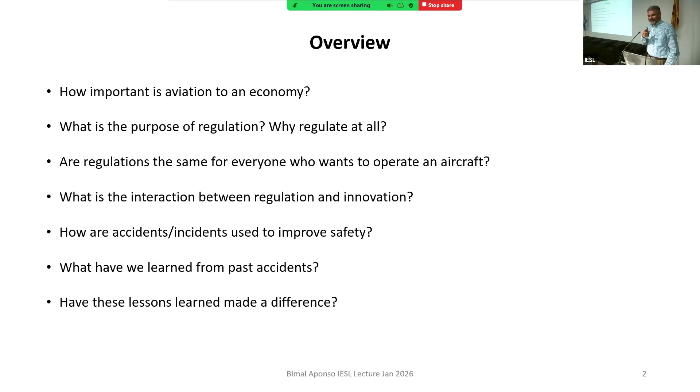A colleague of mine and I came up with what we try to do: figure out a few questions the audience might be interested in. So these are the kind of questions I'm going to try to answer.

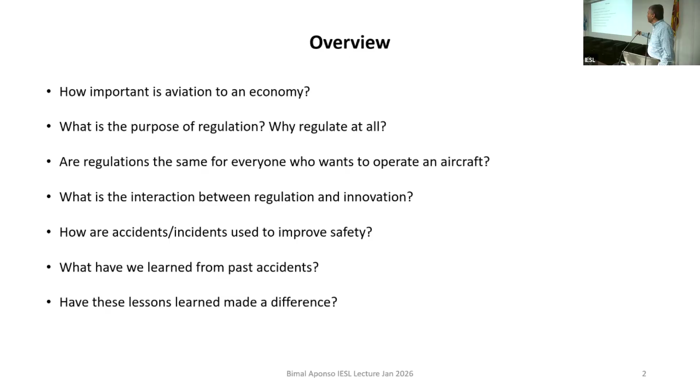How important is aviation to the economy? What's the purpose of regulation? Why regulate at all, why not let industry self-regulate? Are regulations the same for everyone who wants to operate an aircraft? Do you apply the same regulations to an airliner as to a guy who wants to fly on the weekends? What's the interaction between regulation and innovation? I alluded to that a bit before. And how are incidents used to improve?

That's one of the focuses of the talk, along with what we've learned from past accidents. Has it made a difference in current aviation? So, to the first question.

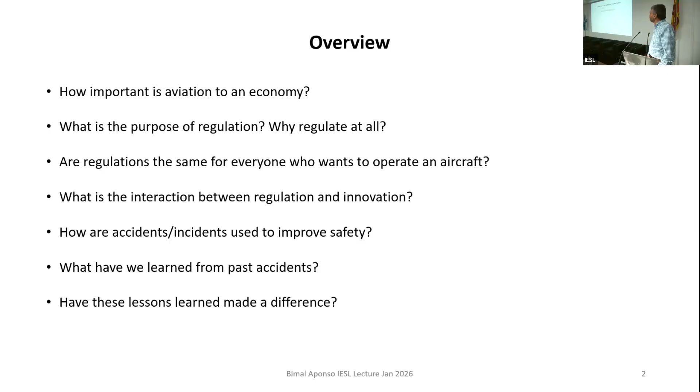Let's see if I can play this. Oops.

What you'll see here is a day in the life of the US airspace system. Starting around midnight, you'll see the aviation system begin to wake up, first in the middle of the country. Around Memphis, the late-night package carriers like FedEx start their operation, so you see Memphis as a big spot of activity as all the flights are sorted out and the packages sent out.

Then as daylight begins on the East Coast, you see it wake up with a sheer volume of aircraft, all managed by the FAA. You can see some Atlantic flights heading out and a few Pacific flights coming into the West Coast.

As daylight moves westward, flights across the country and other cities start to wake up. You can see the big hubs, Atlanta down here, Chicago up here, and this area is the New York airspace, one of the most crowded in the world. But all this happens safely.

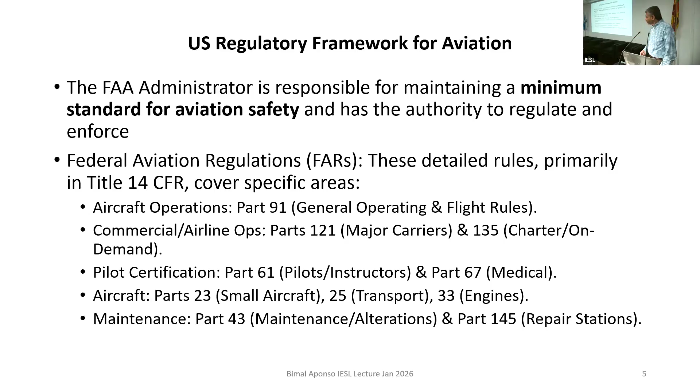So now, trying to deal with the democratization of the airspace. When you regulate, you want everybody, at least in the US, to be able to access the airspace, because it's a public right. So you need the person with a Cessna flying on the weekends, to a private jet, to an airliner, all need to have access to the airspace, but you can't apply the same regulation to all of them. It's not fair. It's too burdensome.

So Congress set up a framework that says when you're prescribing regulations, you have to consider the duty of an air carrier to provide a service with the highest possible degree of safety, but also consider differences between commercial air transportation and other types of air commerce. If you try to apply the same rules broadly, it becomes too burdensome and won't allow access to airspace for the helicopter flying medical equipment, emergency stuff, or the private pilot flying for pleasure.

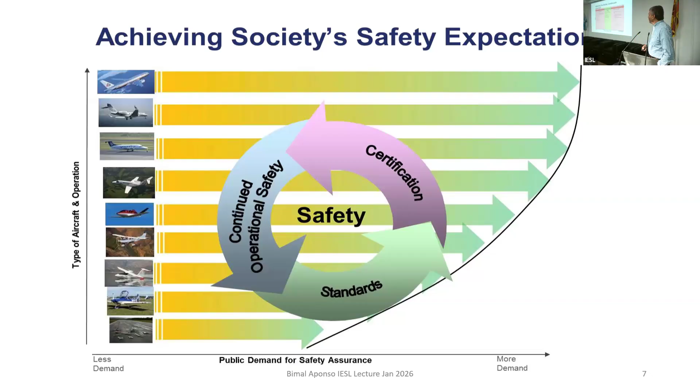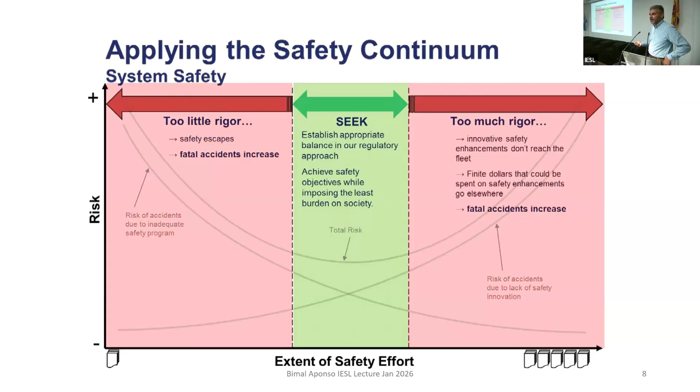So just a quick word about some of the regulations, to show where public perception is really important. You'll see later on some of the accidents where changes came because the public really advocated for them. Initially, back in the 1930s, nothing really galvanizes public opinion rather than famous people. So in '31, and four years later, a couple of crashes killed some really beloved, well-known people. They established the Civil Aeronautics Act and said, okay, with the safety board, we started ensuring — if we want this airline system to be relevant and successful as an industry, then we need to set a level of safety, we need to regulate. They didn't do that until the public came up and said, okay, you need to regulate.

There were two mid-air collisions, one over the Grand Canyon en route, flying visual, and one in the terminal area in New York.

These two accidents resulted in large changes in the air traffic control system. For example, after this, they basically said all aircraft are going to be under radar control. Previously, airplanes got on an airway route and were allowed to visually separate and go on.

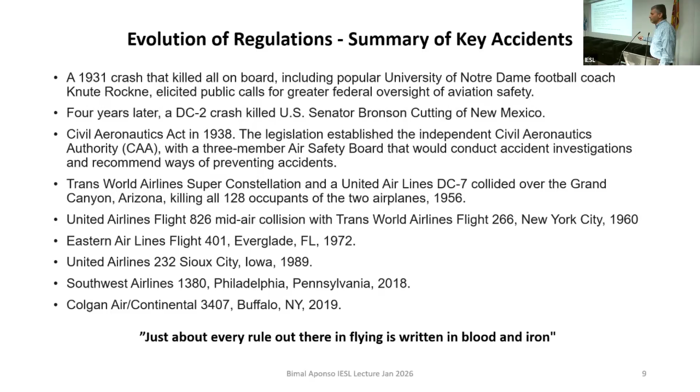Key in this is the United States Congress set up the National Transportation Safety Board in 1967. This is a very important part. A critical part of this is it's a completely separately funded agency. They are not part of the Department of Transportation. They are essentially almost a law unto themselves. So they are not reliant on funding from anybody else, and they are then free to provide completely unbiased opinions on accidents.

They actually look at any kind of transportation accident. Most famously you hear about them in aviation accidents, but big bus accidents, or even pipeline issues, anything used to transport stuff, they will look at it. I think even the oil well blowup in the Gulf of Mexico, they investigated.

So it's a very critical part. Now, it's funded separately, and the FAA, when they make recommendations, the FAA doesn't act on all of them, but the FAA has to say either yes, we agree with this and here's what we're going to do, or no, this is not practical. So this is always the relationship between the FAA and NTSB - not entirely friendly.

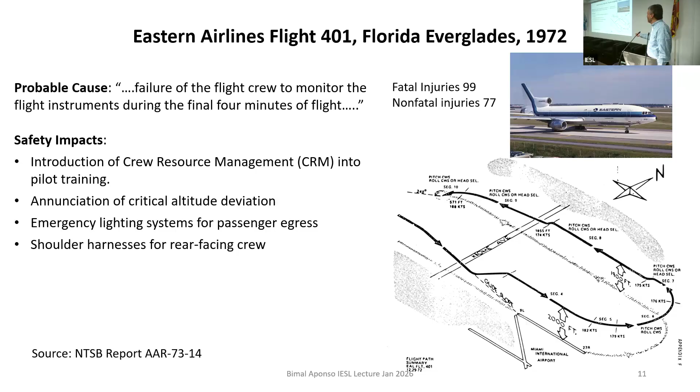CRM is now a standard thing, and I think Shiv knows all about CRM as well.

Another big seminal accident was the DC-10 crash in Sioux City, Iowa. The DC-10 was a 3-engine airplane, with one engine in the tail and 2 on the wings. Here's the start of the ground track. They were climbing out, or in cruise, when the main fan disc of the tail engine completely fractured and separated.

It was a big piece of the engine, I'll show it in the X-ray. What it did was spew shrapnel, with pieces landing on both horizontal tail surfaces on each side. In each of those horizontal tails were the 3 redundant hydraulic lines driving them, and it severed all 3 hydraulic system lines, bleeding them dry.

So right about here they had a complete engine failure, and then they realized they had no flight control. They could move the control column, but it had no effect on the controls. They had no control, and one of the ailerons was floating up in the fail state, so the airplane always wanted to turn right. What was going for them is that they had taken off from Denver.

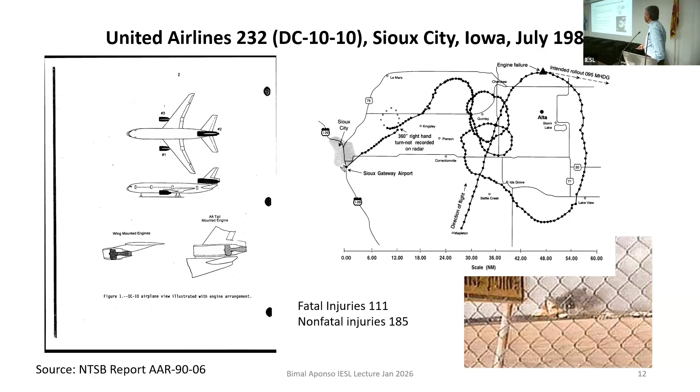So what happened? The probable cause was the failure to detect a fatigue crack. Here's the disc. They found all the pieces of it and they put it back. You can see the crack, it just broke right across here. And all these fan blades, which are typically rotating at around 5,000 revolutions per minute, just flew in all directions.

What they found was they traced a metallurgical defect to the titanium ingot that was used to fabricate this part. It had a little void in the ingot. When they started making the bows and stuff to build it, they kind of made it worse. And there was a little crack developing, and none of the crack detection methods detected it.

So what came of this? They said, okay, we need to do more research on non-destructive testing, really improve the fatigue crack propagation, understanding the basic science of how cracks propagate. And the other thing is the fan casing. This fan casing was supposed to really contain the damage, but it didn't. So, okay, look at how those engine events should be done. And it's interesting—the next event I'll talk about shows the success of whatever they implemented from here.

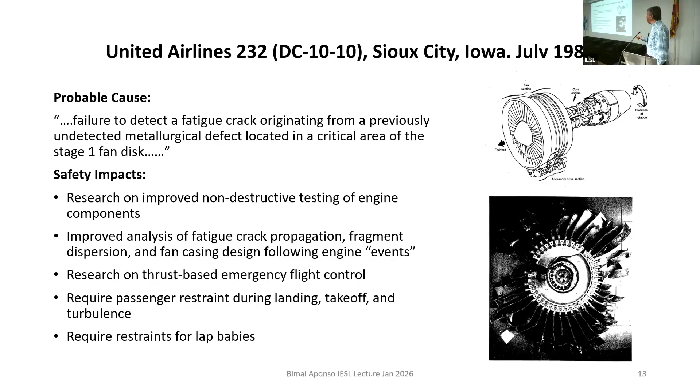The next accident is Southwest 1380. I actually know about this because I was asked to comment and provide an opinion on this as soon as I joined, even though it had nothing to do with my area of expertise.

Southwest 1380, what happened? Here's the engine and the cowling that goes with it. If you notice, the engine has a cowling that opens and latches underneath, and it opens for people to access the engine during turnarounds so they can check the oil levels and so on. What happened with this is one of the fan blades broke and flew up. It actually broke at a point where maximum impact was where this latching mechanism, this fan cowl latching mechanism, was right under where it actually hit.

Now, what that did is it sent a shock wave and opened the latch. The cowling then opened in flight. One part of the cowling stayed put, this side broke off, flew up and hit the window just about the point where the window flew out and sucked out the passenger who was sitting in that seat.

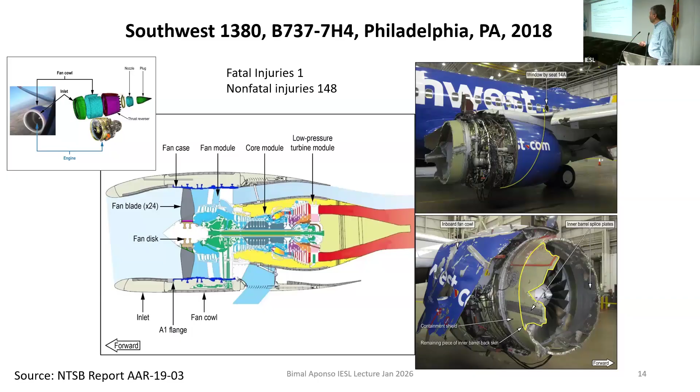Out of that, the probable cause was the low cycle fatigue crack in the fan blade, at a location that was critical to the structural integrity. So it came apart. It was a series of very low probability events. The fan blade came apart just right where it hit the cowling, the cowling opened up and hit the window just about where the window failed.

When I looked at this, I had to remember this is such a low probability event, but yet that doesn't matter. A person died. What can we do to improve the system?

So really, the regulations are being sort of adjusted. There's a gap in understanding, so they're working on improving it. You try not to mess with regulation too much, because right now, quite honestly, it takes about 10 years to change a regulation, because there are so many requirements.

You have to go through public and industry impact statements. You have to go to public comment. You have to disposition all the public comments. So it's better to just get the industry together and say, what are you guys going to do about this? And have the industry sort of self-regulate. Essentially, that's what the FAA did.

They convened an industry-FAA committee, and they talked about how to improve the modeling to prevent this accident in the future. The NTSB recommended, and Boeing acknowledged, that they need to redesign those cowling latches. The FAA has accepted their redesign, and they are now retrofitting all the older 737 new generation aircraft at their own cost to the fleet.

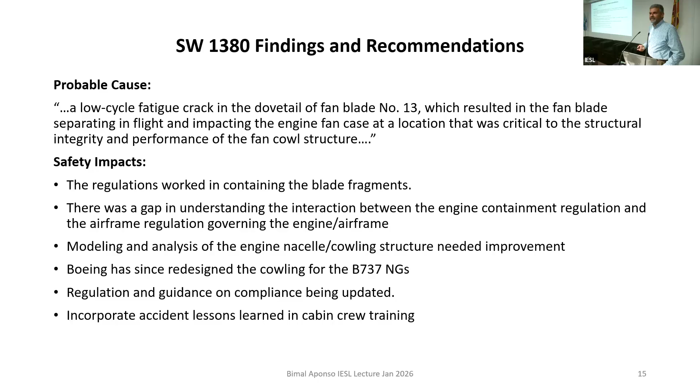Again, every part of the accident must be evaluated for information that can make the system safe. The last accident, this will be really interesting to the pilots, but here's the Colgan accident.

And there's a video that was made by the FAA. So this is a commuter aircraft.

Continental at the time, it's Colgan Air, flying for Continental Airlines. It was a twin turboprop de Havilland Canada aircraft. The crew had gone from Buffalo to Philadelphia, Philadelphia to Newark, Newark back to Philadelphia, back to Newark, and this was their last leg for the day. They were within their duty day, but they were tired, and it was a little icy, not too bad, and what was happening, you don't see it.

They were discussing a lot of different things in the cockpit - talking about unions, talking about race, complaining. So as you see later, the integrity of what they call the sterile cockpit was not maintained. So what you'll see here is how quickly something can go bad, from flying normal to bad.

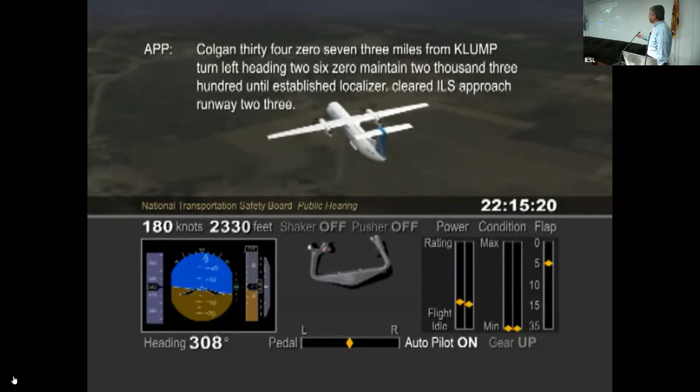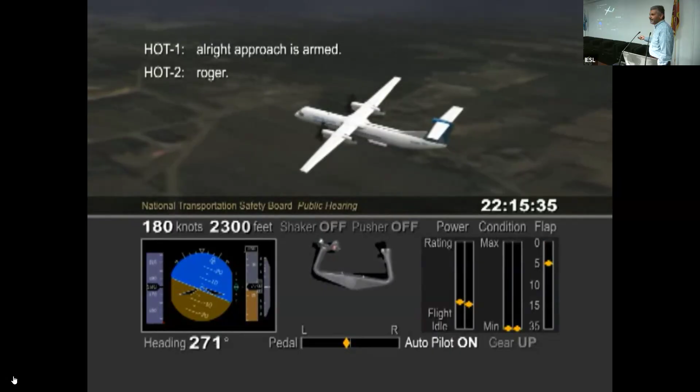Then they get the instruction from ATC and they're still at 180 knots, doing well. Just look at this little red bar here - that's the stall speed, based on what was set in the aircraft. That's not what they're expecting, because they had forgotten that switch, or didn't know what they were doing. So the red bar is kind of down here, and 180, that's still doing fine. By the way, this is the control column, left and right - if it goes down, that means it's pulling back, if it goes up, it means it's pushing forward. 180 knots, 186 knots, and everything was going well.

He's got the flaps down. His power is almost at flight idle now. He's really got the power down, trying to get this. Now the airplane starts slowing down, right? He's got the flaps down, I think he also had the gear down - yeah, the gear is down. Now the aircraft really starts slowing down, because the aircraft is very... and you can see this red bar coming up.

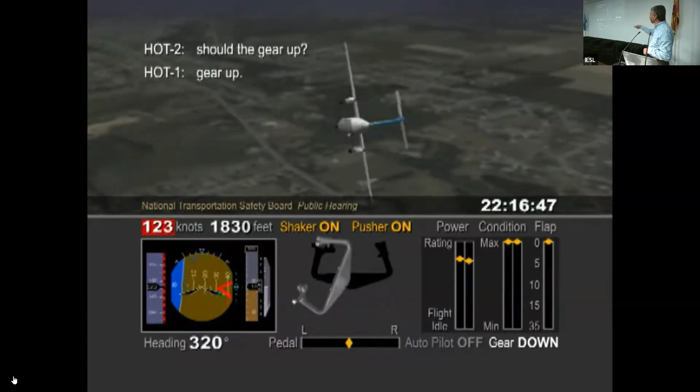Boom, the stall warning comes on. The stick shaker comes on. What does he do? He pulls back on the stick, right? The aircraft was not stalled, but when he pulled back on the stick, he stalled the aircraft. Immediately it goes into gyrations, and he's going, what's going on, what's going on? You can see the airspeed really dropping. The nose points downwards, the stick pusher comes on, pushing the stick forward. He pulls back against that, and they crash. You can see how quickly things went bad.

What happens with human beings is when they get tired and you get startled, you do stuff that's against your training.

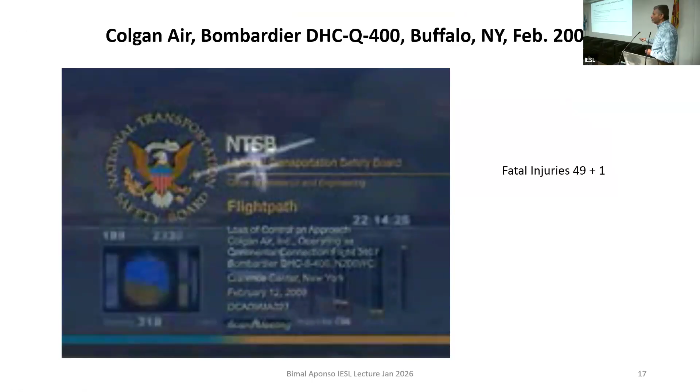So 49 fatal injuries, including one on the ground. That's the class 1. This is an interesting accident because go to the probable cause. The probable cause was the captain's inappropriate response to activation of the stick shaker. The stick shaker said, you're about to stall, and the last thing he should do is pull back - he needs to gain speed and get the wings flying again. But his instinct was, I'm close to the ground, pull back. And the aerodynamic stall from the aircraft did not recover. There were lots of other factors, like the reference speeds and so on that I talked about, but this was the main factor.

What was important about this was the passengers, relatives, and interested parties formed a very powerful lobby group. They went after Congress - you need to do something about how pilots are trained for stall, you need to do something about crew fatigue and rest. They lobbied for years, and got Congress to put it into the FAA's requirements. Every 3 years the FAA gets reauthorized, and Congress puts a laundry list of things the FAA would do.

So thou shalt change the training requirement and the stall training for stall. Previously, the training for stall was pretty benign, minimum altitude loss. Here they said you need to get more serious than that and train. These are the contributing factors: failure to monitor airspeed, failure to adhere to cockpit procedures, captain's failure to effectively manage the flight and not be a leader, Colgan Air's inadequate procedure for airspeed selection. That all has to do with the stuff I talked about in terms of the reference speed settings.

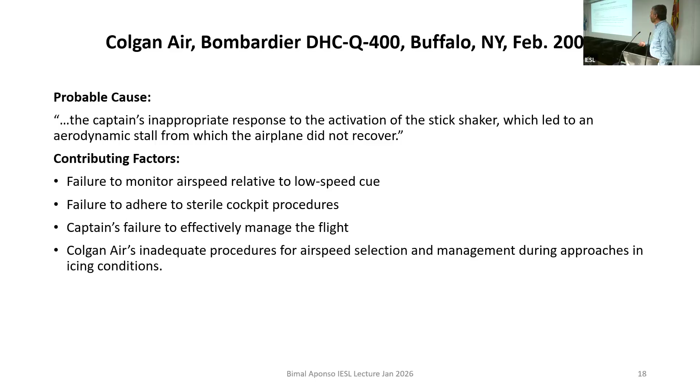But the impact was quite large from this accident, and it shows the power of what people can do when they form a lobby group. They required the regulations to be changed for operators in terms of training - develop and conduct training that incorporates stalls that are fully developed, no longer the small stalls that you can easily recover from. Fully developed stalls are unexpected, involve sudden autopilot disengagement, and include airplane-specific features.

So in fact, the FAA - I was at NASA at the time - used our simulator to try and train, to look at what you need in terms of simulation capability to do this kind of training. My friend was doing that, so I got a chance to fly some of those. What they literally did was have the research pilot fly while the test pilot would be with a hood.

Essentially, they would turn the plane upside down, point it to the ground, and then tell the pilot, okay, lift the hood and recover the aircraft. So you're pointed to the ground, you have to roll the wings level and slowly pull back on the stick without overstressing the airplane.

In a simulator, obviously pilots know they're not going to die, but they develop lots of simulator procedures to really startle them. They would have pilots doing the river approach into National Airport, following the river, and suddenly hit them with a big wind that causes the airplane to stall and forces them to recover. My friend showed me video of pilots saying 'push, push, push' but pulling the stick back to their lap. That's how ingrained it is that at low altitude, that's the instinctive reaction.

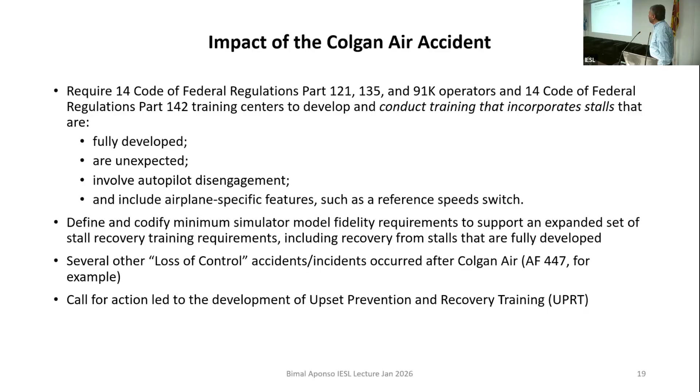That's been the impact, and this hasn't happened by magic. This has happened because of consistently looking at accidents and improving.

Impact on passenger survivability - one of my colleagues was the chief scientist for crashworthiness, and I was talking to him about this. You remember this Asiana accident that happened in San Francisco around the time we were living there. If you see the video, the airplane landed short, dropped the wing, actually cartwheeled and landed. There was only one fatality, and that was because one passenger got thrown out of the airplane - it's a bit murky, but I think they got hit by one of the emergency vehicles. No other fatalities, and there were over 300 people on that airplane.

This one you might have seen recently - the JAL 350, a brand new A350 that landed on top of a Japanese Coast Guard airplane that had taxied onto the runway in error. It landed, it caught fire, and everybody survived. Why? Because none of the slides exploded in the heat. Why? Regulations.

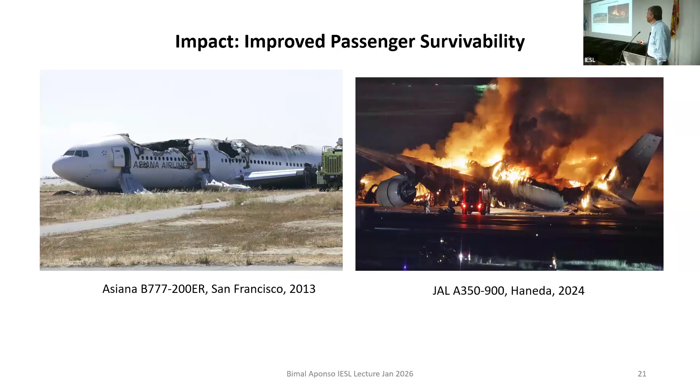Whenever you work on an airplane, the first flight is kind of a religious experience, because until then it's a bunch of equations. In the US, there are three organizations that can certify airplanes to fly in the airspace: the FAA, the military, who can certify their own airplanes, and NASA. They can do their own certification and test the aircraft, but they all have to have processes the same as the FAA.

So they had a kind of type certification. From the very inception, I was part of what they call an independent safety board that essentially cleared the aircraft all the way through design and through first flight. As soon as the plane flew and landed safely, my job was over. So I had two positions, at NASA and the FAA, and I'm no longer, although I still have their computer.

Anyway, so it hasn't... no wait, it flew. The first flight was while we were all furloughed and told to stay at home, but the NASA guys kept working without pay and got it to fly. I think they're collecting data before they go on the next flight.